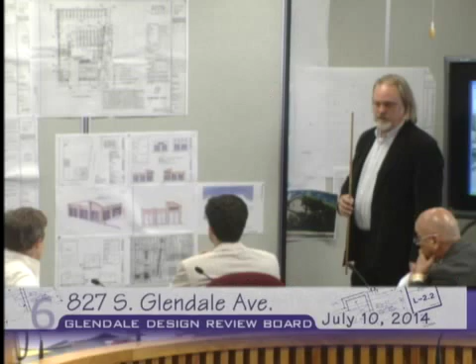I'll just run you through the drawings up here. If you remember the previous presentation, there was, let's just say, a lack of clarity in the drawings, to the point that staff was confused about the orientation of the building, the board was confused, and to some degree the architect had also been confused. The drawings weren't clear, but if you remember, the general shape of the building consisted of this bay with a curving roof and then a flat roofed portion.

We had a lot of problems with some of the proportions and some of the detailing, and the board recommended many conditions, I believe 17 conditions for the project. The redesign significantly improves the overall design, retaining some of the character features that are, I believe, part of the Enterprise goal to have a curving roof shape on their new projects.

If we look at the site plan, the original proposal was oriented in a north-south orientation. This proposal may be a little more square, but does have more of an east-west orientation. There will be two existing driveways that access the site: parking for clients coming in, and then also parking for the rental car storage.

This is the existing car wash building here. The board had asked for a landscape buffer to be placed along the south facade along Garfield, so just over a 5-foot planter has been placed here, and the building has been moved up to the north accordingly.

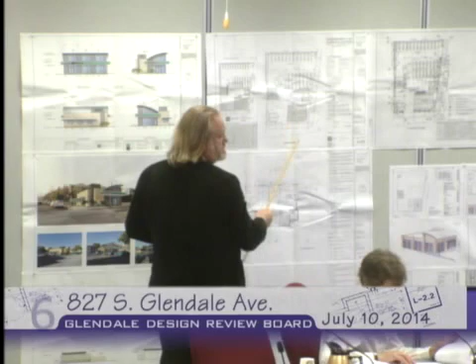There's also fairly extensive landscaping along this facade, and along the alley facade. In terms of layout, we have a street entrance coming in off of Glendale Avenue, as well as an entrance to the waiting area for clients that faces out to the parking lot, which we think is appropriate.

There are many aspects of the previous layout that made for an awkward composition, and the board took issue with. Looking at the elevations, we have a fairly simple material palette consisting of corrugated metal elements, smooth stucco elements, a sheet metal cornice, and a standing seam metal roof at the curved section of the building, plus a projecting metal canopy that will cantilever off the facade.

This is the Garfield Avenue facade. This is the facade facing onto the parking area, and this is the street facade facing Glendale. You can see in the renderings here that the building will have nice sculptural volumes.

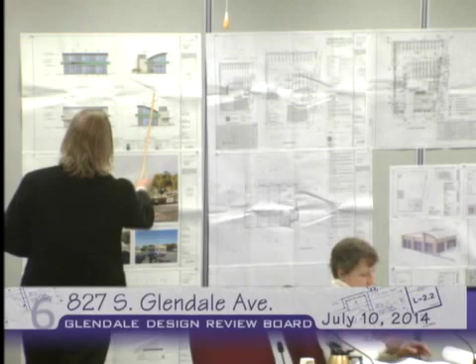The HVAC, which was an issue in the previous proposal, will be screened from view behind this raised parapet area, which also provides signage facing south. The sign band coming around the building carries the green color, which is a signature of Enterprise Rental Car, plus provides signage opportunity facing Glendale and also facing the parking lot to the north.

At the bottom here, this is the existing car wash. A block wall will be built in front of the car wash on the east side of it, and it'll have a planter bed in front of it so that climbing plants can screen the car wash to some degree.

Roof plan: there was a concern about drainage on the previous proposal. There'll be internal drains draining the flat area of roof, and the curved roof will drain onto that flat section. So if you'd like, I can run through the conditions and explain how staff feels the proposal meets those conditions.

Is that the only signage? Yes, there'll be three signs on three sides of the building. Pole signs? No pole signs.

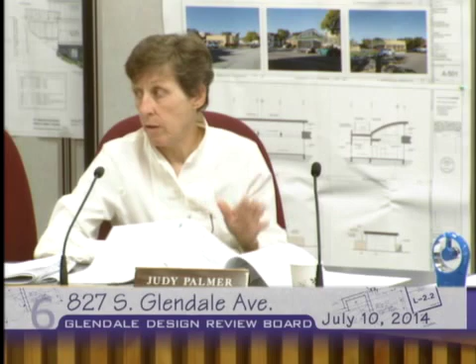So the board's conditions—I overstated the case. There were 12, not 17. Do we need to go through them? I don't know that we need to. That's fine if you don't want to.

Do we have any questions on the presentation? I had a question on the corner tower. On the roof plan it's called a metal screen, but is that a framed structure? Yeah, that's a frame structure, and the corrugated metal will serve as the screening.

Just to make sure that it is framed. Yeah, it's structural. You can double check with the architect, but I think that's the only way they could build that. One other question, the AC unit location—there's an opening on the roof plan. Where is that on the elevation on the west side?

The opening in the roof plan, for accessing the AC unit, would be facing west, so it's not visible in the rendering. It should be right there. There might be something missing—you can double check with the architect. But the plan does show that there's an opening for access. Any other questions? No, I'm okay.

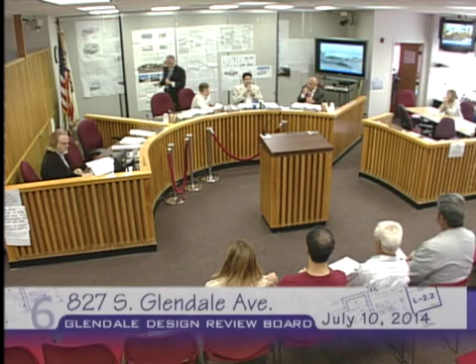Hello, my name is Armin Kazanchian. I'm the current architect on the job. Jay did such a great job of explaining it, so I won't give lengthy explanations. There is an error on the drawing—there should have been that equipment screen does not extend. There should have been a line there.

Just very briefly, we looked at your conditions, agreed with all of them, and designed the project from scratch. The only thing we kept was the roof shape, but we wanted to make that an interior volume as well, instead of just a planted-on shape on the roof. So the customer waiting area, the counter and the cubicles are under that volume, whereas the private spaces—the offices, restrooms, and break room—are under the lower flat roof volume.

So we agreed with the site issues, so we oriented the building with the long axis east-west and pushed it back. We put a screen in front of the car wash canopy that was going to be exposed once the building was demolished. I think we were successful in meeting all the conditions, so I hope you would agree and approve the project.

I have one question. The wall that's adjacent to the car wash, on the first sheet it says it's 7 feet, the second sheet it says 8 feet. From recollection, it should be 7 feet. The intent wasn't to completely touch the bottom of the roof. This might be a correction.

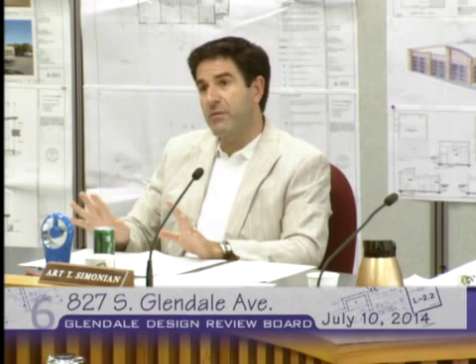Any other questions? As far as the window system is concerned, overall it's going to be a black framed aluminum storefront system with clear glazing. And some of the fixed windows, are they going to be storefront as well? Yes, so all the glazing is going to be storefront? Yes, even the punched openings.

The treatment of the building has 2 volumes, one enclosed with punched openings, and the other more open, but it's all going to be storefront windows. Are you going to have a recess in it? On the ones, it's going to be about a 2-inch recess. It's a 2x6 wall.

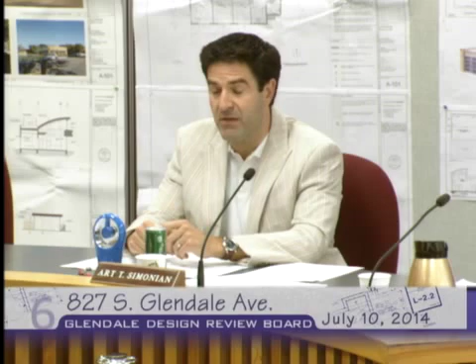I do think the corner tower piece is quite nice in that proportion, where if it extends to the midpoint of the building, it might be a bit overpowering and lose that emphasis on the corner. So if possible, it'd be nice to limit it to that one-third proportionality, as opposed to going to the midpoint, and perhaps work the units in such a way, maybe moving that drainage behind it and reorienting the units, one east-west, one north-south, to achieve that. But I realize you're going to need some clearances around it.

That said, I believe the overall building design is well thought out. The orientation of the building within the site fits quite nicely. The circulation works, both for customers and car storage. I again commend the fact that the building was moved farther north along the residential street. Although code doesn't really dictate that, I think it's going to break up that corner and create a nicer prevailing setback as we venture into the residential area. So overall, I support the project.

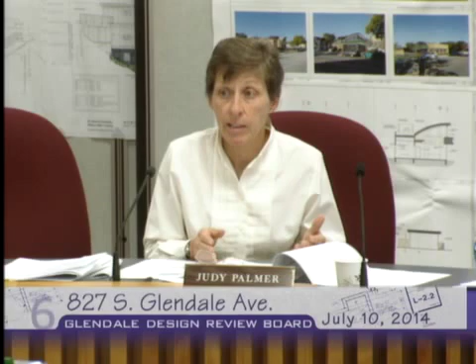And the tree locations on the Glendale Avenue side seem to be interfering with the existing street trees, so maybe those can be manipulated, moved around, because I think we have enough landscape area, but move them around so everything isn't crowded onto that sidewalk.

But as far as the building goes, I think it's a much improved design, and I could support this.

Jay mentioned that the second driveway will be maintained open. Currently the site has a gate, and that driveway on Glendale Avenue has never been used in daily operation. I thought it was an open driveway. There's a barrier there, but I don't see a barrier here. You're talking about this driveway on Glendale? You might have to open it up for the architect because we don't think we've seen a gate there.

Was there one at some time? I believe Jay was referring to the roll-up gate towards the alley that we're going to be replacing, but there is no roll-up gate on the driveways. There is a rolling gate on the alley side that's not allowed by code, so that's going to be replaced with a block wall. Okay, thank you.

Do we have any conditions? We do, could you read those to us please? There's one we didn't get resolution on, the location of the reglet channels on the south facade - whether you prefer the elevation view where it's regularly spaced, or the rendering where the upper line spacing moves up higher. I prefer the rendering. I prefer the rendering too. Okay, so we'll put the control joints as drawn, as depicted on the rendering.

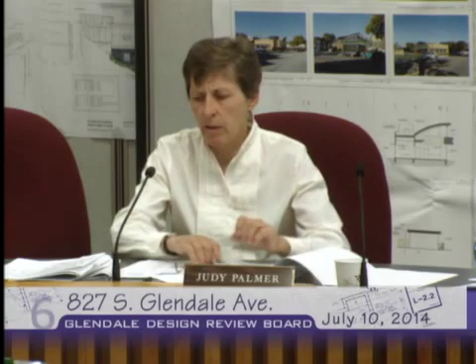Also, the trees on the Glendale Avenue planter should be spaced so they don't interfere with the street trees, or perhaps relocated elsewhere on the site so the number remains the same. I think Mr. Mardian had a good point, maybe put one over on the other side. We have 3 on the other side though. There's not a lot of room between the car wash and the other side, only a couple feet, and it would be hanging over. What we'll do is retain the number of trees on site and make sure there's no interference in inappropriate places.

I'm not sure if board member Mardian thought the canopy would benefit from having some tiebacks up to the wall - is that a condition? I think it's going to be a necessity at some point. I do think that was a staff recommendation to keep the clean lines and not have the turnbuckles, but I think structurally he may not be able to make it work, especially with the wood frame. So, unless, Madam Chair, I think the architect wants to...

Please come up again, Armin Kazanchin. We've got another one just like this that we've done, and it's engineered and in construction. If you notice on the section, there's some beams floating through the space - they cantilever out and carry that cantilever. So my preference would be not to put the 45-degree tiebacks; I think it's a cleaner look without it. You can see it in both sections - there's two of them that extend out, Versalam beams that carry that canopy. Those beams aren't in the same line as the canopy though - the canopy box itself is larger, so the structure of those beams carries out, and then there's a framed box around it. That's fine, we can make it work.

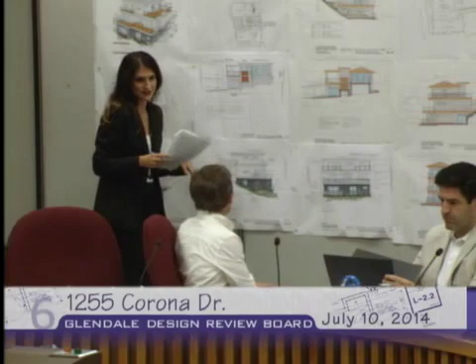So what I've done is I've pinned up the previous plans that were reviewed, which would consist of these elevations right in here, and then I tried to set them side by side as best I could so that you can compare how the project has undergone its revision. What I'd like to do is, if you have any...

Interrupt you for a minute? Is there a plan that shows this image? Because this is totally different than what this is. That would be this facade right in here. There's a pitched roof, gable roof on... Right, this is the project as built. Right, those plans are the projects that were reviewed by the board before, which was going to work from this.

So this was done without any approval? No, it was. There are active building permits. That was the original design approved back in 2003. So this came in 2011? Correct. Okay. So what happened was, again, it basically got put on hold.

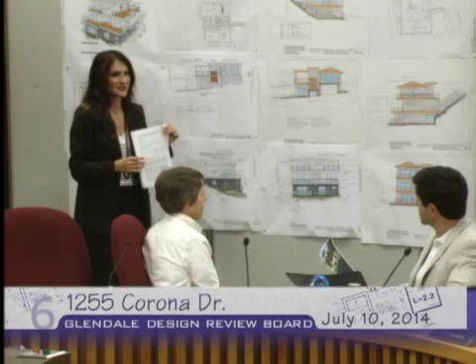They stopped their permits. New owners have come on board, and this is Dr. Krosh, the new present owner of the property, who's owned it now since, I believe, 2007. So he's basically redesigning it to his liking as the new owner. So again, these were the plans that were reviewed by the board a few years ago. This is the current proposal, based on the board's comments.

So what I'd like to do, since we have several conditions, unless you have some questions regarding the site planning, mass scale, and design... Yes, I have a question.

Madam Chair, were there any code compliance issues with the building at the time, during plan check, or more like during construction, because it started? So were there any setback issues? Were there any kind of FAR issues or anything like that at the time? The project went through a conditional use permit process.

At that time, there was... I believe it was the slope, maybe the width, and the width of the front. Because at the time we required a CUP, it was for lot size, for the lot width, because it's less, so it would have needed a variance too, and there might have been a variance for the 7,500 square feet as well. Correct, I believe I have the entitlement highlighted in the report.

I do mention that in 2003 there was a variance granted, and also a CUP. But during the plan check review process, I don't recall - I might not have been the actual plan checker at that time. The only issue we've had more recently has been the overall height, which I will go over in my presentation.

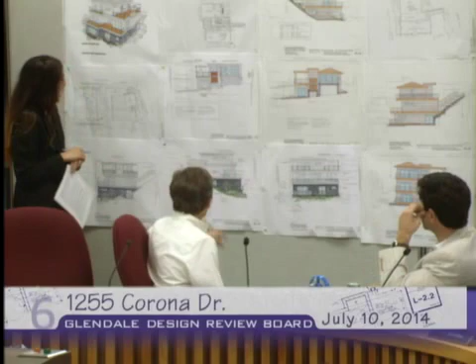I don't know if that will require them having to play with the earth a little bit, depending on, because they have some retaining walls out there. So do we have a survey with the grading, do we have a site plan that depicts the retaining walls? I have this, the most recent site plan. I have the old site plan too, which I didn't pin up - those were the originals, because those walls were constructed per those original plans, if I recall.

Just bear with me for a moment. What about the building sections? Because in a hillside project, that's crucial - that would depict, from the street going down, where the retaining walls are. I have the old ones, but not for this current proposal, because they were not proposing to change that. The only real change for this project is basically just the proposal to redo the facade. They're not proposing to change any of the existing site walls or retaining walls - those stay, correct, that were originally approved and gone through the plan check process and were constructed.

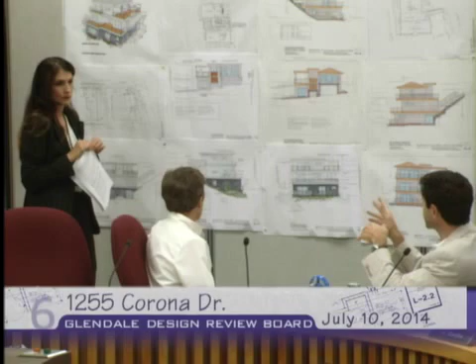Well, the problem comes in without the section - really trying to understand what the old code was, which was 35 feet to the top of plate, versus the new code, which is 32 feet to the top of the roof. And all of a sudden there's a big difference there. And so that delta really, when you work down from the roof, it's where the building meets the site and what kind of retaining walls you have to do to get that to work. So that's what it's hard to grasp without those drawings.

And as a zoning question, we'll make sure that it meets code as we go through the process, and I believe we already have on the drawing showing that it does. If it had not, we'll have to carefully look at it during the plan check process. The applicant is fully aware of this issue. So like I said, if it requires them having to play with the earth a little bit to make sure that wherever is exposed is where the overall height begins, then that's what they'll need to do.

I believe the maximum height of retaining walls is 5 feet exposed at the bottom. Correct. So with a height problem, you kind of have to start way at the bottom and put in your walls, then go to 2 to 1, and keep going to the point where you could make that 32 feet work from that last piece over to the top of the roof.

Are you referring to retaining walls that are below the structure? Because there's some that are detached, since the drawings were in here. It's hard to lower the roof, partly because of the complexity of this project.

All of this has already been approved, and the height, taking the roof off, meets the 32-foot height limit. If they had to bring down the plate height on the top floor a little more, that would also be a possibility to bring the height down, as well as through earthworks at the bottom of the house.

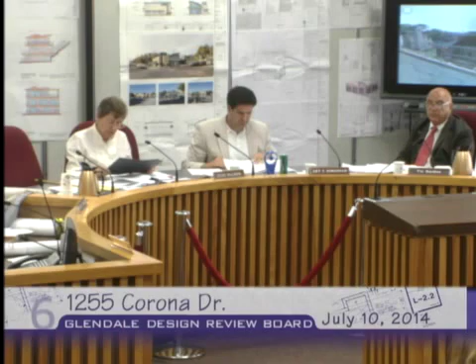That concludes my presentation. I had a question: I'm having a little trouble understanding the floor plan versus the perspective in the rear elevation. If you look at the floor plans, there are small balconies in the center deck, but on the perspective, it's a continuous deck that runs on that lower or mid-level. Seems like the floor plan doesn't match the elevations.

Maybe we can get that, call the architect. Okay.

Do you have any other questions? Do we have a plan of the ground level, the garage level? Do we have a floor plan of that? I'll look through the old one, but not a new one.

Do we have a landscape plan? We have the old one, because they're not proposing to change that. Is that in the packet? No, I'm going to put it up on the board.

This was the original garage floor plan. Since you mentioned cross sections earlier, I'll pin this old one up - maybe it could shed some light. And this is the old, originally approved landscape plan.

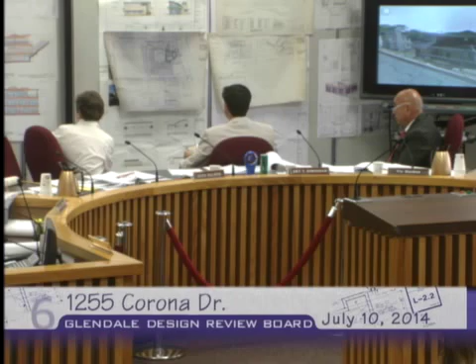Which way is north? The site plan doesn't show it. Okay, so north would be this way, this would be south, and here's west and east - so to the right of the garage would be north.

There seems to be some sort of a slab area created at the bottom of the site. Do we know what that is? If you look at the right side of the plan - which area are you referring to? You can rotate that.

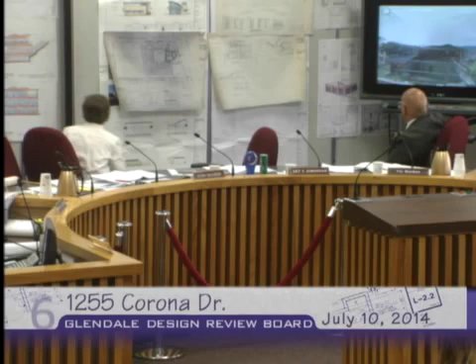Can you rotate it, Palmer? Sure. Do we know what that is, because it's a finished slab? And is this new, or is this proposed or existing? I'd have to defer to the owner on that.

And do we know if these power lines running there are just an easement? I could get you an aerial view - I believe it is a utility easement, but I believe they're overhead. He will have to explain that better.

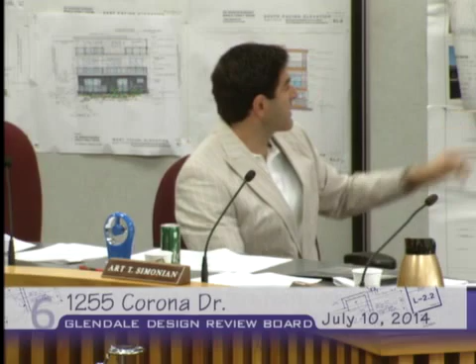Do you have new sections for the new design that clearly depict, similar to this section, the contour of the property, where your retaining wall is, where your height would begin at, where it goes to 32 feet, what the height of those retaining walls are, and what is happening with that slab at the bottom? Do we have any?

We don't have new plans because there's no changes from the original. Everything is as existing, and it's going to remain the same in compliance. I understand, but the codes have changed, so I'm asking, do you have any site sections which have been drawn? No new ones, because it's in compliance with both the old and the new codes.

And what is that flat slab area at the bottom? It's just a hill for now - I think they proposed it as either a grassy or some kind of recreational area for the backyard, because there is no backyard. Are you the owner or the designer? A little bit of both. Has a licensed architect worked on these drawings? Yes, Barry Cameron Stroh.

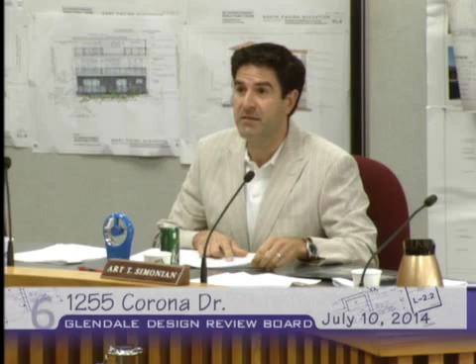Because on our site plan, it says 'finished slab' - it says FS over this area. Yeah, which means FS typically stands for finished slab. So that's what we'll propose to complete as per the original plans.

Well, long story short, these are all the drawings that you have? Yes. Okay.

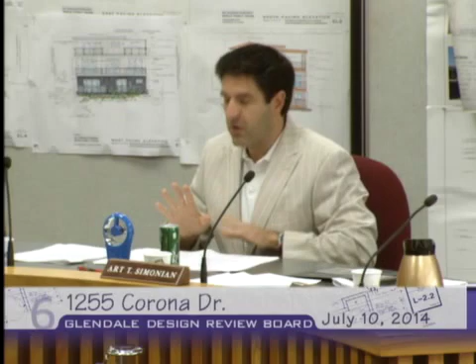And staff has verified that it meets the 32-foot height limit. According to this plan.

If you look at the west facade, that would be the lowest point. If I recall, the lowest point should be the southwest corner. Are we looking at this one? No, this one right here. I believe this is the lowest corner of the property, if I recall.

That might help. Measurements are, on this side, the actual measurement is only 27 feet, and on this side it's 32 feet. Actually, 31 foot 6 inches.

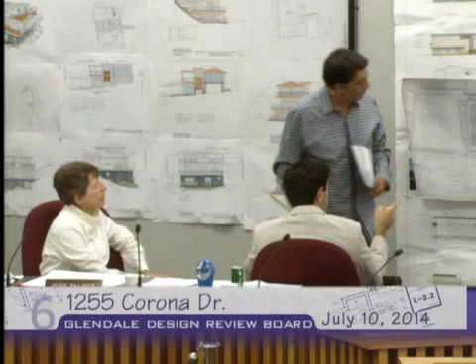Okay, so how would that 32 feet work on that section? Is from, well, from here, assuming, because you're not changing this, correct? Right? Okay, yes. So it's from the very top of that to the very bottom of the stem wall on the other side.

This section shows the north side of the house, because it's the master bedroom, and it would be on the opposite side of the structure.

Would it be this area? Garage area. That's the garage section, right through. No, it'd be this area down here. Well, this one is the garage section. Oh sorry, wait a second. This is the garage.

Is this what exists? I mean, these? Yes, yes, that's what exists. And the same thing there? Yes, it's already built. I don't see it there.

Sorry, I didn't mean to interrupt you. No, I think you're pointing to the same items I'm pointing to. It's just confusion with the drawings and trying to orient oneself.

If I might add, since the building is already built, and we know what the building looks like with this peaked roof, and it's going to be a shorter building than it is, if staff will ultimately be verifying that 32 feet height is the correct measurement, the board could focus more on the design aspect of it, if you think that the height issue is causing a design problem.

But in terms of zoning, meeting the zoning requirements, it's ultimately the responsibility of staff to ensure that that's accurate. And since we have a built building, we have the rare opportunity to really visualize the mass and scale in the flesh. I guess where we're just coming from is, did he draw something with the new design that indicated that, or just chop the roof down to meet that 32 feet?

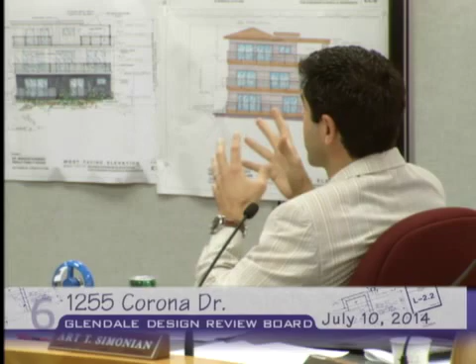It actually should be easier to document it, and so we're just trying to get our arms around it, and this is one of those hillside cases where there's more questions than answers.

But I guess while the architect's here, or the owner, designer... There's no changes from the original, so it's in compliance with all the previous...

Where are the utility lines relative to the house? They show 8 feet shorter than the roof. Yes, they probably are. You can see them from the top level. But they're not up against... there's some distance, maybe 10, 12 feet away from the back of the house.

I think it shows an easement on that site. It shows along the side, not the back. Let's see if we can get... there's a plumbing easement on the side, and there's a utility easement at the back. But if anything, we're going to be pulling away from that easement.

On the south side, you can see the lines here. There's a power pole between the properties, and then it's running... it shows 8 feet lower, and it's right next to the building. So my question is whether that side, on the left side, do those utility lines come up close to the building?

Just at the property line. No, they're maybe 10, 15 feet away from the building. It shows you don't have that. No, I mean visually, because the building goes back with each level. I think they're probably from the top level, I'm looking at the lower levels. Right, okay, I just wanted to clarify that.

I had another question for you. The side garage walls, I noticed you're calling them out as metal panels, so that is not a retaining wall, that is not a backfill, so the driveway just bridges over to the garage? Yes, it just bridges, but the previous plan called out retaining walls on the side. They're not built yet, so are you going to build those walls, or is it going just to be whatever is proposed, crawl space? Yeah, we will build it as proposed. If it's a fill space, they wouldn't be retaining walls, or they would just be clad per code. You can't have an open bridge underside.

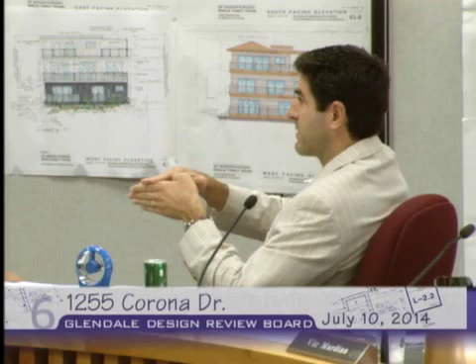But the lower left elevation/section shows a bridge kind of scenario. It doesn't show stem walls on the side where it's filled, in which case the apron and driveway would actually be on fill. Because if you already have built structures and then you're trying to create a bridge, the driveway is going to sit on a bearing wall, and that bearing wall, if it's existing, should support it. And if it's not existing, then stem walls need to come in.

There's two large pylons built to complete the driveway. It was built by the same builder as the next property. I don't know if you can look at it. The driveway sits on two large pylons with concrete. While I'm here, I just found the view from Palmer below.

And then I'll try to bring us back up to the... is this useful for you now? View for one second - those are your walls you were talking about. Yeah, can we zoom in if possible? We don't have the new version. Maybe we can, yeah.

And so these are existing retaining walls. All that is retained, which is similar to this. It does look like there'd be an opportunity to build a 5-foot retaining wall somewhere along here and build up a 2-to-1 slope to adjust the height, or the point where it emerges from the earth if needed. But the applicant does testify that he dropped a line and verified the heights physically. Then the question becomes, if that existing retaining wall that's there will be able to support the backfill upon compaction.

It's already done. Well, no, but you could have a wall that's been designed to have dirt against it, or you could have a wall that's not designed to have dirt against it, but to support a building. So the placement of the rebars within the concrete wall or block wall determines that. Whether the metals are on the outside or inside determines which side is in tension, which side is in compression, and how the wall would react when the earth's against it. But I think it's been designed and completed the way the original plans were. So correct, but with the new codes, you would have to put dirt against it. That's what we're discussing. Yeah, I think so.

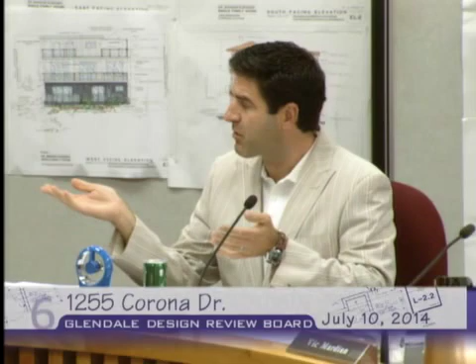So why are we going off of the 32-foot? Why aren't we going off of the old? But that's a building code issue - the building department can't extend the zoning codes. So they allowed the building permit to remain open for that project. But now he's again coming in with a totally different design, so we have to have him comply with today's zoning code. Which we believe he is. But not today's building code.

Right, not so much concerned with all the zoning issues, because I'm sure you guys are going to check that. But I'm concerned the floor plan matches the elevations presented today, which is our duty for that. So how could I be assured that the rendering works with the floor plan?

We will work very carefully with the applicant. We do have on that roof plan the actual footprint that I'm depicting, talking square footage, footprints, and things like that, because I'm going to ignore this plan. This one I think we should ignore, whatever it was, because it was revised design. So we should really compare the new one with what's out here today, I mean what has been built.

I have no problem supporting the project. I don't know if we're there yet, but I need to see correct plans, or you will verify these plans that match whatever is presented in the perspective. If everybody agrees, that works.

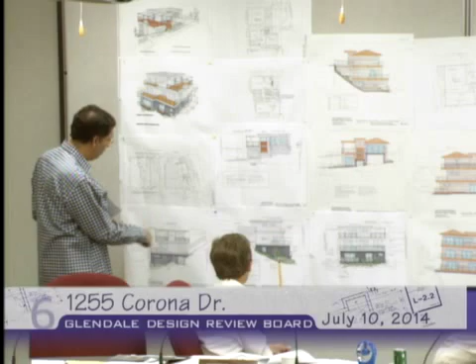How does the roof drain? The roof drain, I think he has it pitched. It's connected to a perimeter drain system around the entire house. It goes interior-wise around the perimeter of the house, and it's got a separate drain line that goes down to Palmer. So there's no external downspouts? No.

Other questions while he's up here? Thank you. Actually, if I could point out something that you may have questions for Dr. Qureshi about.

Looking at the as-built elevation from Palmer, the lower two floors proportionally look more or less like what we see in the rendering and in the drawings. I am questioning, however, at the garage level, at the top floor, where we see this projection to the right here, which we don't see on the drawings. I'd like to ask if that's going to be demolished or built out and extended.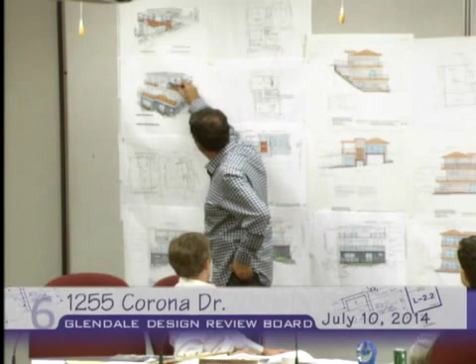Right now they have the HVAC unit sitting in the roof that's going to be here. So to house that HVAC unit, the architect brought that straight up rather than jog it back, and this becomes a little mechanical room. Right now it's sitting in the existing roof. So you're extending the wall. Yeah, this wall, rather than being a roof, has to complete the wall to house that unit. Otherwise it would be like a half-height structure.

And what kind of HVAC are you putting there? Is that the internal unit for the internal blower, forced air blower and all that? Yeah, the furnace sits right in this space right here. Is it a split system? So far he just has a single system.

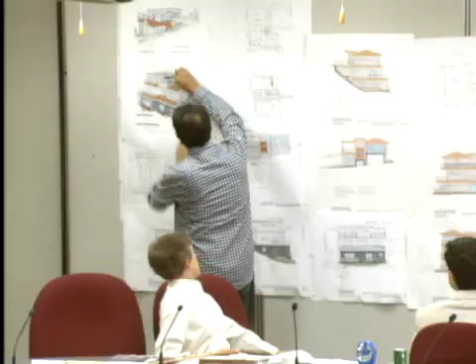The question I have is, if you look at the photograph, you have the roof line running parallel to the rear facade, you have a return, and then you have another extension here that I don't see on your drawings. The extension is filled in, that corner is filled in. But that's a pretty big corner, it's a long room. Yeah, it's room sized. But it's because the angle of the photo is such that this thing is the same angle as the slope, and that's right where the mechanical unit sits.

That's the same width as your entry. It's like 6 or 8 feet, something like that. But the unit takes up the whole space in there. So that's just going to be the framer figuring how to put some framing around it. We can still create that jog, as long as the unit fits.

Even in the aerial, it is a considerable amount of square footage. We unfortunately have been representing to the board that you are not adding any square footage, and it looks like you actually are. So when we get the new drawings, we'll just have to verify that you haven't gone over FAR or anything. Is that considered, is it because it's attic space?

It's not attic space. No. Or you could find another location for your equipment. Yes, leave that as built. That's perfect, yes, we can do that. Either proposal is fine. Do we have any other questions? No. I'm comfortable with any suggestions to complete the project.

Thank you very much. Close the public session. Mr. Mardia. Thank you, Madam Chair. Like I've said, I'm sure staff is capable of resolving the zoning issues on this.

My concern is that the plans, prior to submittal to plan check, need staff to confirm accurate plans that depict the perspectives shown. And I'd like to see that area brought back, I think it creates a little more break into the building. As Jay pointed out, that corner piece is filled in. I'd like to see that back again.

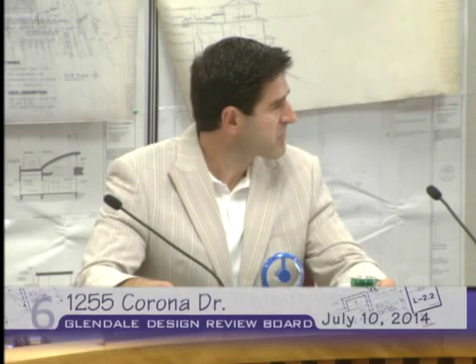These drawings kind of remind me of that one hillside project that came back about 4 times, where we were just having a lot of trouble understanding it.

Overall, the direction of the design I don't particularly have an issue with, and it is terraced, and it has certain attributes that are in line with the hillside design guidelines. So overall, the materials, the colors, the railings, all the specific components of the design work, and I'm confident those will get resolved.

What troubles me is the fact that it's very difficult to review a project like this where the drawings are incomplete, and you have 3 of us having a hard time. So I could only imagine what staff's going through, trying to sort these things out between the old and the new and whatnot. It is complicated.

We could simplify the matter. Whatever the scenario is, if it's coming in front of us, it should have the components that the design review board typically expects from all the other projects, which is site plan and floor plans and elevations and sections and renderings that match.

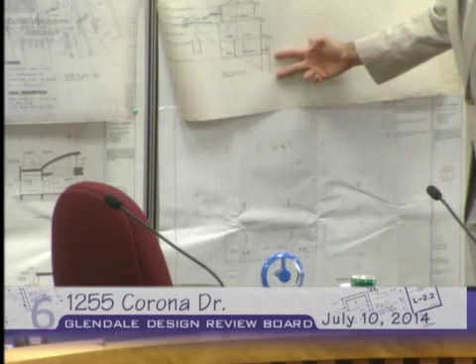Because when we're looking at this, we have a large wall as depicted in the actual picture, and then we have elevations that are showing basically grade right here with flowers coming out and with planting coming out. So that wall's actually here, and when that wall's here, there's a lot going on that is not depicted here, and so it's difficult to assess it. So those are my thoughts.

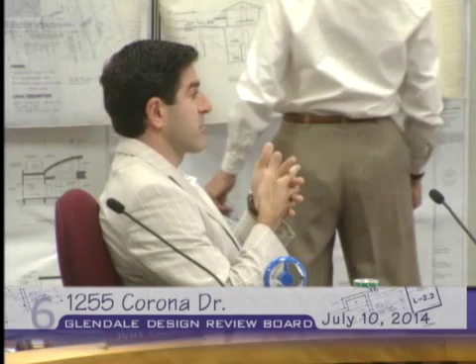You're saying the building is higher? Well, I'm just saying that would look higher. What typically we have is a site plan, and it's very easy to understand where the retaining walls are, what the heights of the retaining wall is, what the top of wall is, what the bottom of wall is, and where the 32 feet is measured from. And that area is not landscaped at this point either, so it just doesn't have the updated landscape drawing, updated grading plans.

Here's a clarity for you. I'm assuming that window, that's my sliding door, or was before or not? That's going to be this. Yeah, that's going to be that. Correct. So there's a substantial change, and that's what I'm pointing at.

Whether or not that roof change makes it work, I'm not sure. And so he's going to have to, I would imagine, if we're truly trying to adhere to the 32 feet, start building up walls and then doing a 2-to-1 slope to get that to a point to start measuring this 32 feet. In which case he's putting dirt against that, maybe or maybe not.

I don't know. So he's saying at the top, this portion right here, from here to the top is 32 feet, not from here. It's not so much that I'm debating the 32 feet - I'm sure staff could figure that out. I'm not really pointing at that.

My concern is really having a set with a lack of drawings coming in front of us. That's really the biggest issue. Because we just spend a lot of energy trying to understand it, and I think if some of those drawings were there, it would be easier for me to understand.

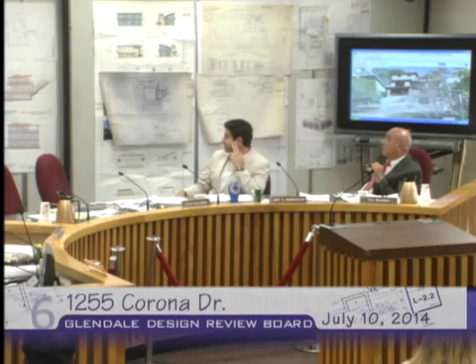Now I'm more confused because you stated this was the 32 feet, or whether either side. That drawing, that picture depicts that wall down here. That's what I'm trying to point out. So that's at least, well, 5 feet. My 32 is in here somewhere. But the wall is somewhere, the grade is somewhere, about 5 feet, with the presumption that we're going to be adding at least a couple of retaining walls.

If the board would like to give us direction in terms of what you'd like to see on those walls. Forgive us, this has been an extremely complicated project on our end and on the end of building and safety. We're at the point where we have to move forward now that we have an attractive nuisance on the site, so we're not just running against our own deadlines and rules, but also the police are now involved. We don't want to put the board under pressure, but we are all under pressure on this project.

Recognizing it's clear looking at this photo that the elevation is not accurately drawn, it does seem that within the constraints of the zoning code, through a series of retaining walls, we'll be able to get the height to meet the zoning code based on our rules. We hate to ask you to presume something's going to happen, but if you give us solid direction, we can make sure it happens.

I'd like to ask the applicant to come back up and answer a few questions. Maybe we can move on with that. What's your name and address? Manzur Eskarashi, 2701 West Alameda, Burbank, California.

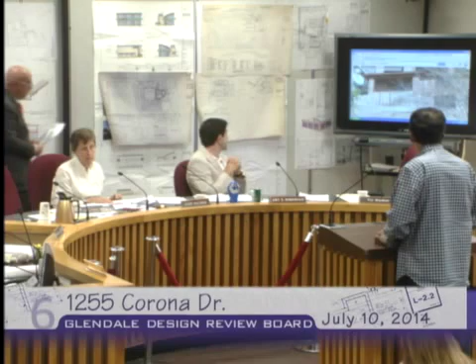That's what you're looking at. So the actual grade is that masonry, that's 3-4 feet of masonry there that you see. So this is what you're seeing, sorry, this is what you're seeing. I think they're within that 32.

Well, nevertheless, this wall where you see the wood cladding is significantly higher than what's shown on the elevation. That's correct, yeah. We'll definitely have to figure that out. I suggest maybe we condition it with a...

A surveyor verifies the height. While you're still up here, I'm looking at your material board - you have the fascia as this bamboo. Yes, so that was an error, and what's drawn on the plan is going to change the way it looks because this looks like metal. It is, it just wasn't changed on the board. So it's metal. It's metal, correct.

What is metal - Milka was mentioning too, well, the fascia was going to be this, but now it's the metal. The previous DRB didn't like the horizontality of the fascia and the lines and grooves that we're showing. So we removed that, that was one of the comments that Milka made. We removed that by making it a metal one, and they suggested we make a slightly different color than the other siding, which is all acceptable.

Were you involved with the project when it went to DRB last time? I was, yes, I owned the project then. I see, but it was a totally different project. I actually enlisted the architectural professors at CSUN to design it, and they designed a very modern horizontal structure, which the design review board didn't like at all. So we took all of their 17 recommendations into consideration and just worked through this.

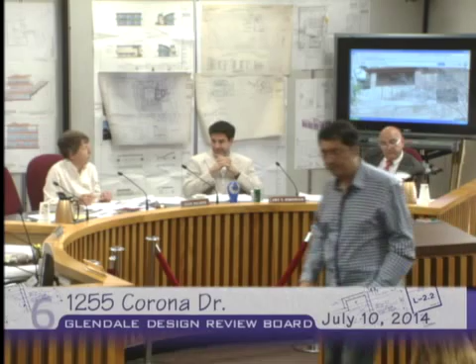Any more questions? Okay, thank you very much. Thank you again. You're done? I am done.

Well, I won't belabor this anymore. I agree with all the comments, and I do think if staff can get all the drawings together, we need a new landscape plan because it doesn't reflect that flat area, and doesn't have anything in the front, so we need a landscape plan that reflects what the new proposed design is doing for the entire site.

And I'm just as confused as everybody else. The last application that came in was in 2012, and these just came in recently, so we've had to push this project fast because of our recent issues.

We'll go over our comments and see where we stand. But before you do that, what's the time frame that they have right now? Mr. Simonian brings out a lot of good points, and everybody else did, and we want to make sure the plans match, but is there any way this could be continued and that information supplied to us?

It's last call, pretty much. You do have the option of return for redesign, which we would have to accept.

But what is the timing with the building department, whatever the fire drill is you're referring to? Well, as a matter of fact, I just spoke to the inspector today to inform him that we're having the meeting. If the project isn't approved today, they most likely will have to expire that building permit.

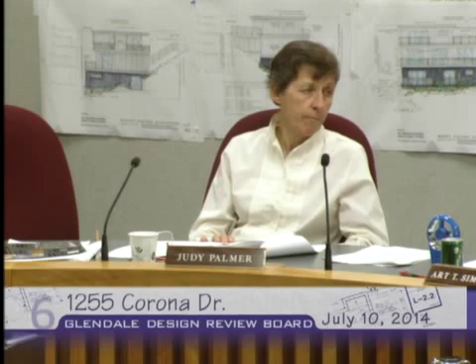I'm comfortable with staff getting all the information, I mean, we've all expressed our concerns, and they've been dealing with this project. So if they get all the information in a time-sensitive way and go over it, and it appears to answer all the questions, I'd be comfortable with that. As with any other approval with conditions, if we didn't get something we were comfortable with, we bring it back to the board.

May I make a suggestion, actually? It's more directed to the ownership. I think it's to your benefit to really go get a professional architect that is available right now and has the capacity to take this on, and to really spend the time and effort required to get these drawings dialed in, or you're just going to spend a lot of time and money and effort during construction that's going to go wasted.

These things, if they're not thought out now, will cost 3 to 10 times more later to fix. So the design fees that you're going to spend now, you're going to save tenfold during construction, as far as delays and construction cost overruns. So your architect, unfortunately, encountered a massive heart attack, so you don't have a lot of time here to work. That's something I think important to point out.

But okay, has the owner looked at another architect or is intending to do this on his own? You can't speak from there. Can you come up again, please?

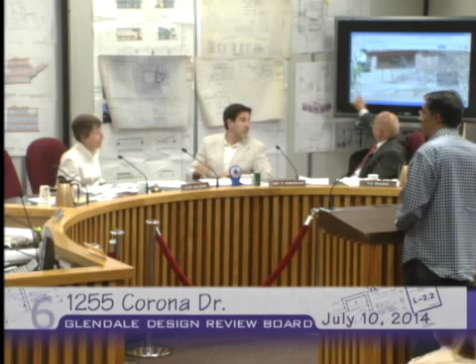May I ask a question that hasn't been asked? What's wrong with the original plan? Yeah, really. I mean, you could certainly change the color a bit and change some of the materials. That's not it, though. I'll show you what the original plan looked like. I thought I was confused, and now I'm severely confused. Well, that's why I said we should disregard this one.

While you're here, what is the material for this shade structure? Right now it's a metal post. It's an architectural feature, just to give some space for the people. Not shade covering or anything? It's possibly a shade covering if it was approved, something that would disappear completely when not in use. The concept we've heard is that the metal posts would rise from the railing on the deck, and there would be guy wires connecting to the garage, and then you could roll out the shades over those, or pull them out.

I've always been a fan of more modern architecture, and since it's going to be my own home, I thought I would try to make something a little more modern than the existing structure. Actually leaning towards more mid-century modern. Contemporary, shall we say.

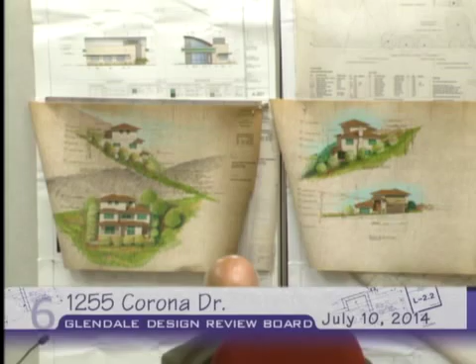I can read back some conditions. First and foremost, all drawings will be updated and coordinated. All elevations, plans, sections, and perspectives will match. There'll be a grading plan that will show any new retaining walls and also the condition at the sidewalls at the driveway bridge, how that will be working. We heard, and I'm not sure if everyone agreed, the final height will be verified through survey. Okay, so that's a condition.

At the top floor, the corner element as built will remain rather than being built out to enclose the interior HVAC units. I mentioned the sidewalls at the driveway, and a new landscape plan that also includes information about the front landscaping as well as the flat area at the rear, as well as the overall site.

And the time frame? Oh, and the time frame, what would you like for a time frame? To be realistic, maybe a week to search for a new architect, and then maybe three weeks total. Three weeks, at least three weeks.

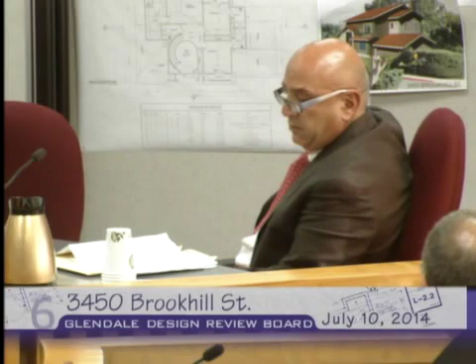Have any questions? I have a question. Now, the report says it's an addition, but this looks like a new house. Well, technically, it is an addition. And because I don't see any existing plans, does the 50% issue come up? Well, internally it came up, and it was like 42%, I think I'm remembering. So it is an addition, not a new house.

The other question I have, I asked this in the past about the story poles, directed story poles there. I looked at the plan of the story pole, they're 22 feet high. Now, what I saw out there was just one height. Is that the plate line? Could that not include the ridge?

Typically, I think the story pole should show the ridge. They sometimes don't show a secondary ridge if it's below. Well, this just showed the corners, and it just stopped. It didn't show the ridge, so I'm wondering. It doesn't show it. It shows the four poles, but there's none in the center.

What is the purpose of the story pole if I'm not seeing it? To get a general idea of the massing.

No, you're right. The story pole generally should show the ridge line. That's the most important point, because I've noticed that on similar other projects too.

Does staff go out there and look at it, or do we rely on the applicant? Sometimes does, sometimes doesn't. We have other people that go out to make sure the sign is posted, and they look to make sure the poles are story poles.

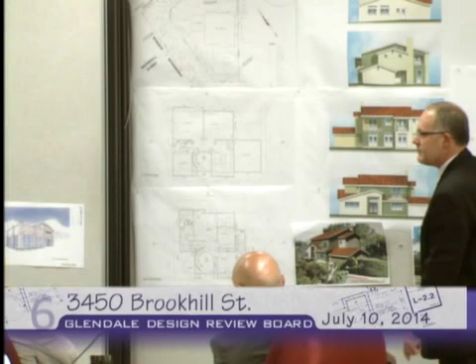And I think I'd advise you to look at the material board closely, because in speaking with the architect, the colors on the renderings and the 3D aren't totally accurate.

So the footprint basically stays like you showed, right? The second floor is popping out over the footprint. The garage is basically staying the same, aside from those small little additions. And then the bath on the second floor is popping out.

And the second floor is kind of popping up. It doesn't project over the existing house any, aside from this little area here.

But is the entire roof gone? No, there is the garage area, and the architect can confirm, but I think he also mentioned this was staying. How are you going to keep that?

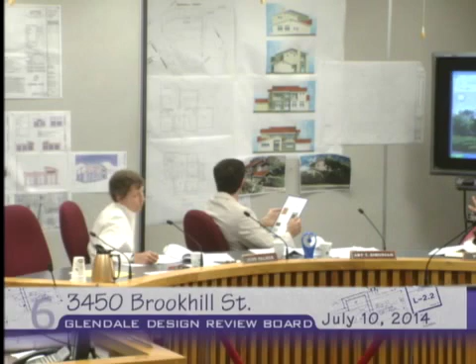I only have one card here, the owner. Do we have an architect? There may only be one speaker. Oh, okay. If there's no other questions... Nobody else wants to speak? Here, I'll take your card. Thank you.

Yeah. Just go up there. Everybody wants to speak. You want to speak? Yeah.

All right, I'm going to open up. I've got an applicant, an owner, and consultant. I don't know who wants to speak first, but why don't you let the architect speak. I don't have an architect on here. Do you have a card for Aram?

Yes, it says manager. Oh, okay. Aram, could you come up please? State your name and address for the record. Aram Natsakanyan, 102 East Prospect in Burbank. I'm the architect of the project. Roger, explain what it is.

This is basically, it's not a new house. It's like an addition on the first floor, a little in the back and a little in the front, plus a second floor addition. And what we try to do is recess the second floor from both sides and from the front, recess it to the inside so that it's not going to look that massive.

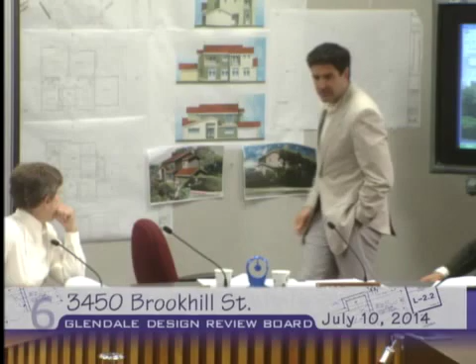What is your roof plan? And you've done the calculation of the 50% coverage? Yes, we did.

So is the only portion of the roof staying existing this part, and a little bit there? And all this is new? Yes, all the other roof is new. Are your setbacks based on legal non-conforming setbacks right now?

Basically, we have the existing setbacks. Yes. And on that portion, we are not doing any second floor addition. Which is here? Yes. What is that setback?

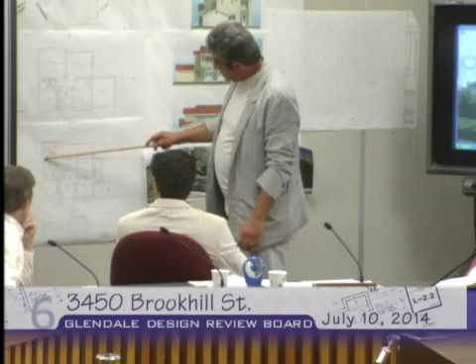If you look at, can I come over and show? Of course, come on up. Where the pointer is - if you look at the second floor plan, this wall basically is this. In the first floor it has a 5 foot setback, and in the second floor, I believe there is another 5.

Do we have setback issues? This wall is the second floor wall. Actually, if you look at the front elevation, it's like this - this is the second floor, this is the first, like 3 feet or so, somewhere around there.

So the setback on the ground level is 3 feet? No, the setback on the ground level is 5 feet here. But in the second floor, even though it's recessed more, it's like 3 to 3.5 feet. Well, that doesn't necessarily matter, Aram. But even if the house did exceed the 50%, the 5 feet would still be fine.

Yeah, but our setback is less than that because it's an R1 zone. It's in R1 zone, yeah. Everything conforms to existing zoning.

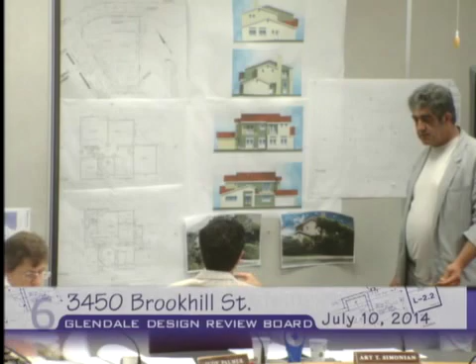Since you're up here, what's your existing ceiling height that you have right now in the house? Existing ceiling height is 9 feet. And what's proposed on the second floor is 9 feet as well? Yeah, second floor. And approximately what is the dimension from your plate height to this?

This plate? Actually, this plate and this plate are the same. I believe I have that shown on the elevation without the color, which shows the height. Yeah, 9 feet. And it looks like 9 feet, and that top portion is 7 feet long.

This top - from this plate to here is 7 feet long. Chiquito, can we pin that up? Sure. That section or elevation that you're referring to? Can I do it there?

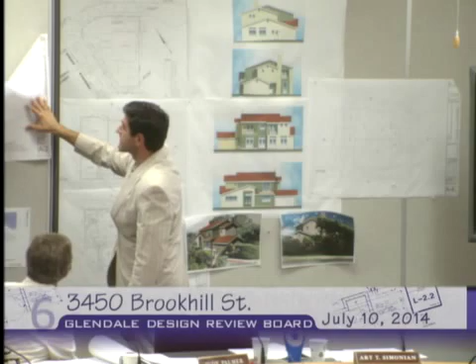Sections - well, yeah, if you have them. I have the sections, right? I don't have section, basically. This one is the other elevation.

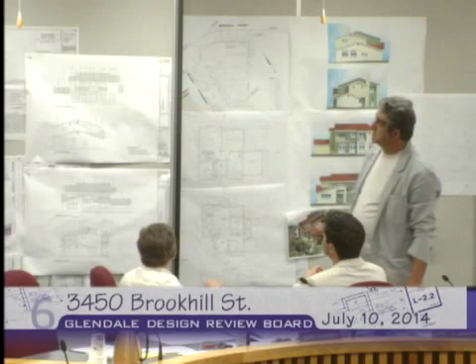So right over here, there is 7 feet 1 inch from the top plate to the ridge. Your story poles that you have right now, where is it approximately? 22 is right over here, the top plate. That's it? Yes, that's your story poles.

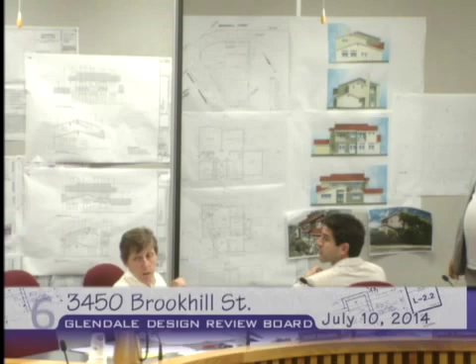That comes to 9, another 9 - 18, and another 4 feet, so the top plate is at 22. We don't have a picture of the house with the story poles on it, do we? Unless Roger does, I haven't seen one.

It's very unfortunate not to have story poles going up to the ridge line - that's why I'm asking. Do you know what the minimum slope of roof you could have with the roof you're proposing? Of tile? Mm-hmm. That's, I guess, 4.5 by 12.

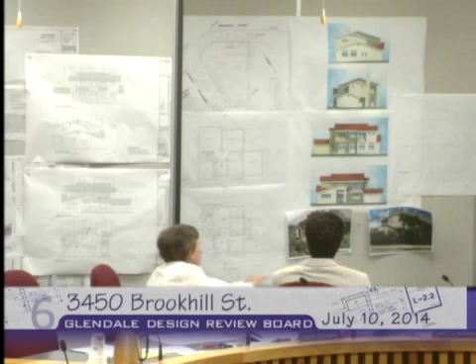All right, I have no other questions. I had a question - is your garage roof slope the same as what you're proposing on the house? Basically, we are just matching ours to the house roof at 4.5. Matching to it? Whatever the garage is, we are keeping it.

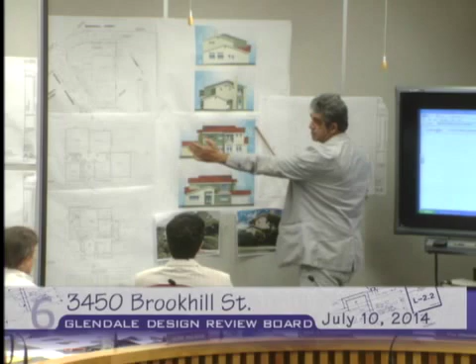Sure, Madam Chair. I have mixed feelings on the mass and scale of this project. I do feel it's proportionally massive for the area as far as compatibility is concerned. That's why I asked whether the 9-foot ceiling was existing or not. By looking at the pictures, generally these homes have 8-foot ceilings. And if you look at the neighborhood, although there are some two stories, they're all pushed back further in their setbacks, with ceiling heights around 8 feet. So I believe there's a little more room to reduce the mass and scale in this house.

Dropping the ceiling height, and I'm assuming the slopes are the same as the garage. And my other concern is the balcony in the front. I don't know if that serves that roof line, or if it's just eliminated by the balcony. And the element with the entry, I think it needs to drop a little more or do something with it. But as far as the tile, I do agree with staff.

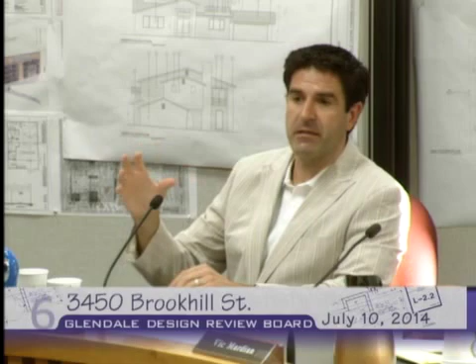Overall, I agree with Mr. Mardian's comments, but I think by reducing the pitch of the roof and simplifying the roof a bit, you'll be able to accommodate some of these height issues, because that roof is artificially increasing the mass and bulk of it. If you come up with a different roof design, and maybe even a different material that will allow you to go shallower, for example a metal roof, you'll be able to actually go a lot lower but still keep the size, let's say.

Also, I think the vinyl windows are not really to the level that we approve, so I would say fiberglass. I don't think we need to go as far as wood, but we have even gone down the direction of aluminum windows as well, if it's on a contemporary side. But the house itself really isn't of contemporary nature, so I think the fiberglass windows I would agree with.

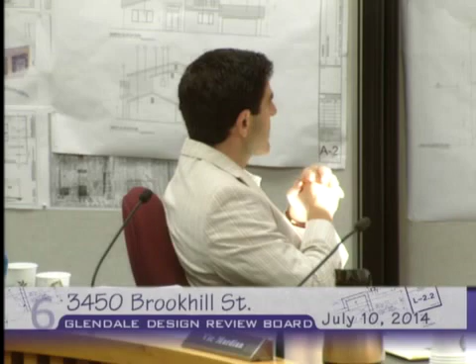But overall, when we're kind of assessing it, the mass and bulk of it is really the main issue that comes up. This portion of the entry, I think, is a bit odd as well, and so is the balcony in the front. It really does get in the way of the design, and if you look at the perspective, that entry coupled with that balcony brings a kind of foreign design language to that neighborhood, whereas if that entryway were redesigned, the balcony maybe eliminated, and the pitch of the roofs lowered, the house would blend in. So those were my thoughts.

I'm in agreement with their thoughts, but I also notice this area here bothers me. It feels like it's hanging, it's just stuck on there. I know it's overhanging here, but when you come up the street, you're going to be seeing this at the corner, and the fact that you're coming uphill makes it even more massive than it is.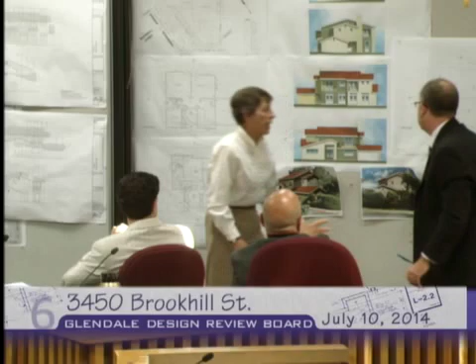You're going to see this coming up the hill also. Anyway, I just think it looks too massive coming up the hill, because the other 2 stories are nestled in and down below at the end of the cul-de-sac. And with the story poles the way they show, it is going to be higher than it shows, and I think that whole front could be dropped down.

And I agree with staff's comment regarding the landscape plan and the roof. I also think that front left, where the front door is, it's like a design that goes with another style. Those are my comments. Oh, what was your last comment?

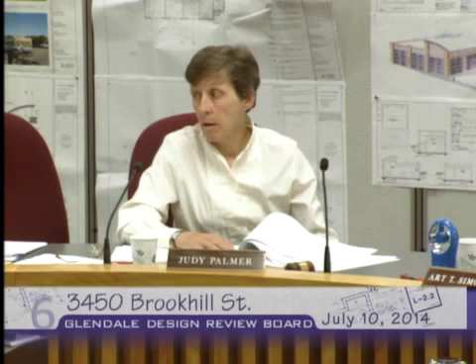The entry element that we worked with, Jay, the whole entry, right. We all worked on that for a while, and we thought it was a little bit Brady Bunch-esque, which both Jay and I felt weren't appropriate for the neighborhood.

Is the shape the issue there, or the height of it? If we brought that down, and perhaps at the second floor where the peak, where that ridge line is, broke up the second floor a little, would that help? Yeah, because when you look at it from the perspective, you have this kind of voided rectilinear thing that doesn't adhere to the design language, just kind of a postmodern shape that pops up.

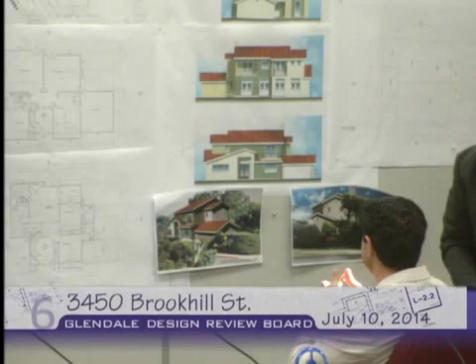Maybe another style of house, I think a line here would work. Sure, break it off. So your house, something, I'll say maybe another break in here, up this or lower this. It would actually be a nicer entrance, a nicer entry, right? You'd have a more formal entry if that happened.

Well, I'm sorry, yeah, can you help us? You were blocking your suggestion.

I'm just saying, design it to look like Board Member Mardian's sketch. Can I draw on here? Sure. Maybe make a break already, a break, and even maybe either lift this up a little or drop this down to create it. So the shed roof on the left would die into a wall, and then there'd be a peaked gable above that? Correct. Yeah, okay.

And as shown, if they're proposing vinyl windows, I don't think they would look that way. They would have a much wider... if I can, I'm sorry, no, I'm just saying it wouldn't look right. Aluminum windows would look more like this.

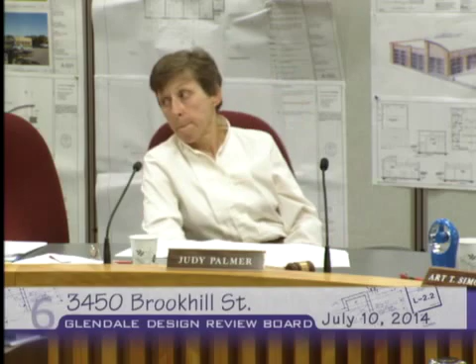If I can just throw out that if we did the lowering of the left portion of the roof, and keeping the kind of gabled entry, that'll produce what we typically call in our design review meetings the monumental entry, which the design guidelines typically suggest we not do. If that's what you think is right for this house, that's fine, and it wouldn't set any precedent, but it's a little different than the direction we usually give applicants.

If I'm remembering correctly, in previous iterations of the house they did have the monumental entry. However, it was much, much higher, and through back and forth with staff it was reduced in height and rejiggered a bit to make it as it is now. My only comment was to readdress it somehow, whatever the architect thought was appropriate to work with staff, maybe not what he drew, and make it shorter.

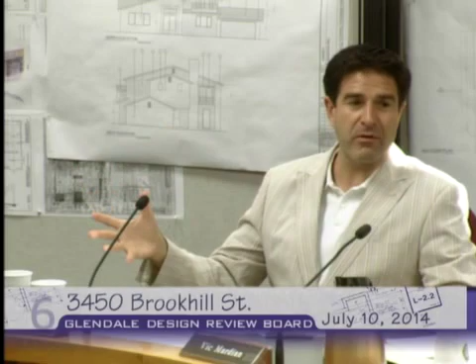I would definitely make it shorter. If you're going to do a pop out like that in a contemporary setting, you would almost clad it with metal and have a different color to really make a pop there. Whereas then you have a sterile white building and then a maroon or dark brown metal siding pop out that becomes a feature, that's different in a contemporary home. But in this setting, it just doesn't quite match the overall style.

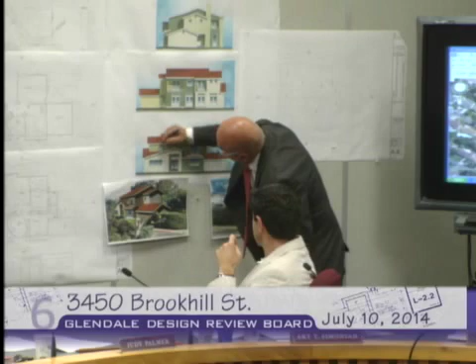In the same vein, they could approach it differently. That left side could be just a continuation of that roof without any shed break, blending in and connecting over with the bedroom. So the left side gable would come down toward the street? Basically we just continue it, and then lower the entry a little bit. Then you'll have a little more roof that breaks the building and makes it look more horizontal.

And you mentioned about the balcony, with lowering the roof would the balcony be okay? Well, it's one of those Romeo and Juliet balconies facing the street that aren't usable, so small it's never going to be used anyway. I think it'll be more elegant without the balcony in the pavilion. Okay.

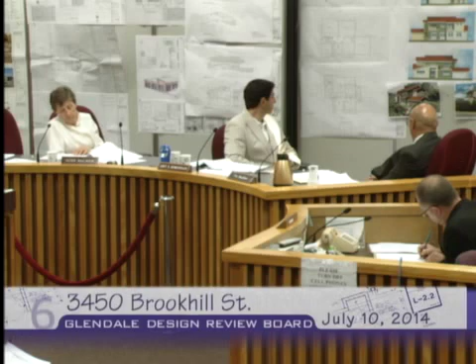Now the other question I have, the windows are recessed. Do they have a sill or anything? I see some wood trim around the windows on the wood siding area, any window sills? The drawings aren't very clear about that, but we could certainly make that a condition, to have recessed windows with sills. He almost has some sort of stucco bezel around it in the perspective, but there's nothing around the stucco ones. So I think that will help make the elevation even more consistent.

Is the material in the back Hardie siding? It just says wood siding. Okay, what would you think of taking that pop out up here, if we left this as it is and put that in siding so it doesn't look like... and then we could have some ornamental beams underneath it too to kind of, yeah, it needs something, it looks like it's hanging.

Okay, well, if we're going to go with the window surrounds, and he's already gone down the route of plaster or stucco with the Hardie siding, there could be a wood trim or Hardie trim around the windows in the portions that are siding, and in the portions that are stucco we could do a stucco bezel.

At the cantilever portion, we could continue the siding over that to blend it in more, with some sort of structural beam underneath, perhaps some sort of an ornamental beam that takes away from that cantilevered pop look.

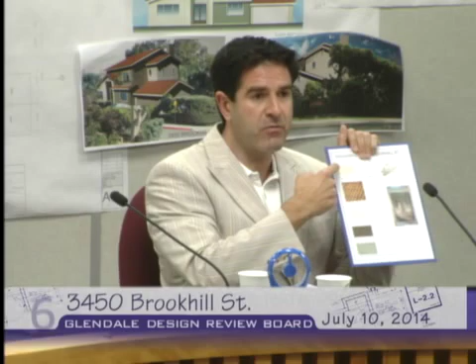And then if you want, even if you go with a Navajo white instead of this, it's still gonna have enough depth to it where the stucco will blend in. But once you go with a peach, it's not gonna look all that great - it's gonna be very loud.

So Navajo white or something like it? Something like in that place of peach, without that color? Yeah, because... okay. And the tile, I think...

Well, depending what you do with the roof and how you're gonna lower the roof or the pitch, that might determine your roof material. So, but in general, it's harder to lower the pitch with that curved tile.

Yeah, I mean with Spanish tile you can't go below 3 to 12 anyways, which isn't that... well, it's still lower - at a third, instead of 7 feet, it'll be 4.5 feet.

Would the board consider an asphalt shingle, kind of just a flat roof surface? With that, or lightweight Hardie board, or lightweight concrete, or lightweight tiles - there's a lot of lightweight options. Yeah, it just depends how much texture and thickness you want on the roof.

Yeah, I think if we're going to go - I don't particularly have an issue with the tile if they seem to like it. But if we go with a darker variety, that's going to match more of the colors. Right, but then the issue is the slope, in which case it's limited to 3 to 12, which is going to lower the roof height from 7 feet to about 4.5 feet. So that'll lower the mass, and I'm okay with that because it seems like they really like the tile.

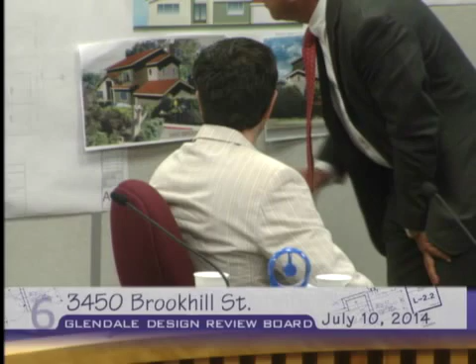And it could be as simple as a 2x, or it could be something more than a 2x. That's fine, it's already what you have. I didn't get a copy of the perspective, so we'll just make the condition to match what's shown in the perspective.

If you want to read those back to us. Not really need to. I will try my best. Roger, if you could help me. Would you want me to start? Well, I've kind of got them. Do you have your list? I have a little bit. Well, go for it.

Let's start off with the easy stuff, the staff comments. Number one, consider providing landscape plans for the site to include drought-tolerant landscaping for review and approval by staff. That's a condition. Okay, will be provided.

Windows shall be of fiberglass or better quality.

Okay, here's the one where we just need to nail down what you want. Specify roof cladding more in keeping with the style of the residence. What was it again? Specify the roof cladding more in keeping with the style of the residence. Roof cladding - the tile, the roof material, okay.

I was trying to get fancy with roofing material. I'm going to let the other board members address that, since I wasn't necessarily clear with your discussion. I know the homeowners would really like the tile that they proposed.

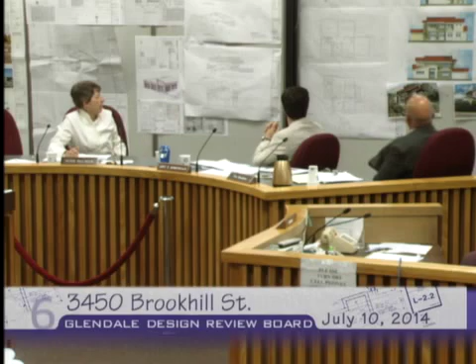I don't think it matches now anyway. No, it doesn't. I think it's a little different, it actually looks a little shallower, so it'll look more like the shallow front. Okay, so we'll lower the pitch of the roof to reduce some of the height.

That's everything I had. I wasn't quite listening, so currently the roof pitch means there's 7 feet between the top of the ceiling and the top of the roof, and you're reducing it to roughly 4 and change with the...

You just can't go flatter than a certain pitch, it's 3 to 12, something they have to come up to, because he calls it out as 4.5 to 12. So we're saying 3.5 or 3 to 12, you just can't go less than that. Okay, so whatever it comes out to be, it's probably another 2 to 3 feet, somewhere around there - it's about 1/3 less than 7 foot 1 inch.

Okay, we'll try to avoid putting the footage in our condition. I'm just going based on the conversation I just had with the neighboring property owner, and wanted to see if that clarified it for him.

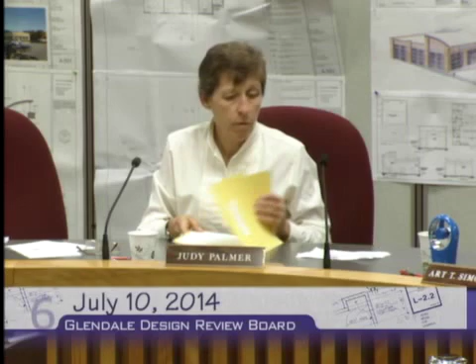We have minutes to approve, correct. Okay, that's for May 8th. We were all here. And I had one question. Oh, not May 8th. Thank you, May 8th, were there any questions on that?

May 8th? No, but I had a question on the, was it the only one sent to us? Which I had a question on. Oh yeah, that's the one. No, I have no, I'll make a motion to approve the May 8th minutes.

So can we have a vote or a motion to approve for May 8th? Yes, I just made it. A motion was made to approve the May 8th minutes. Is there a second? Yes. Okay, second it. Roll call. Mr. Mardian? Yes. Mr. Simonian? Yes. Ms. Palmer? Yes. Motion carries 3-0.

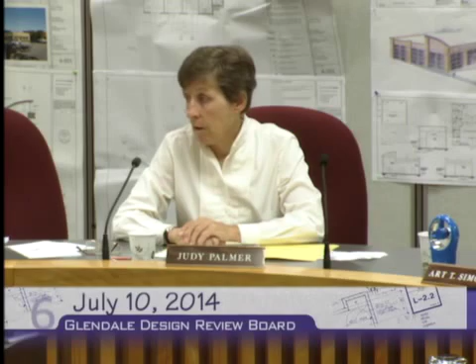Want to make comments on the last minutes? If there's a question, can we do that now? I noticed that project we had with the hill lots stepping down, Carolyn. Yes, Carolyn. I read it as we requested to show the elevations of the houses on both sides, and I thought we wanted a streetscape. That's right, that's not the way it was written.

We wrote a site section through the adjoining properties. To me that means two elevations of houses, elevations of the adjacent properties. Is that two houses, or is that a streetscape? It's just two houses. I thought we wanted more. That would be a lot. Well, I'm not saying the whole block, but just to see how that streetscape goes, that was the impression I got.